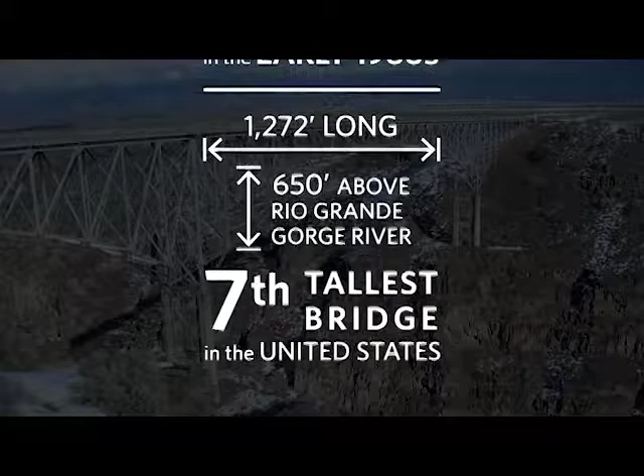An iconic vista in Taos County, New Mexico, the Rio Grande Gorge Bridge, located on US 64, was designed and built by the state's highway department in the early 1960s. At 1,272 feet long and 650 feet above the Rio Grande Gorge River, this historic structure is the seventh tallest bridge in the United States. It is attractively positioned across the gorge and complements its surroundings.

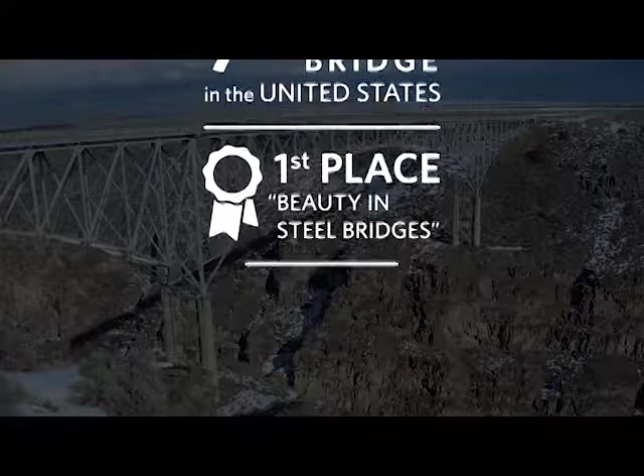Within a year of opening, the bridge was awarded first place for beauty in steel bridges by the American Institute of Steel Construction, and by the late 1990s was listed on the State Register of Cultural Properties and included in the National Register of Historic Places.

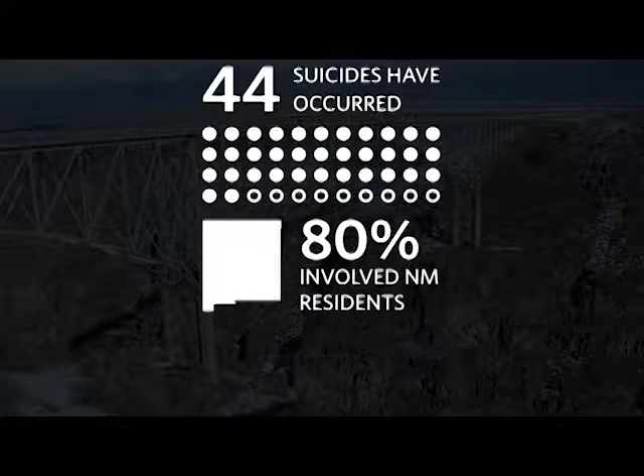While the historic bridge holds beauty, recognition, and significance, 44 suicides between 1991 and 2017 have occurred at the bridge, with 80% involving New Mexico residents, according to the New Mexico Office of Medical Investigators. To provide a broader view of the suicide rates in New Mexico, the suicide rate statewide is consistently 1% higher than the national suicide rate. In the last decade, statewide suicides have totaled 4,235, of which 113 occurred in Taos County and 22 at the bridge.

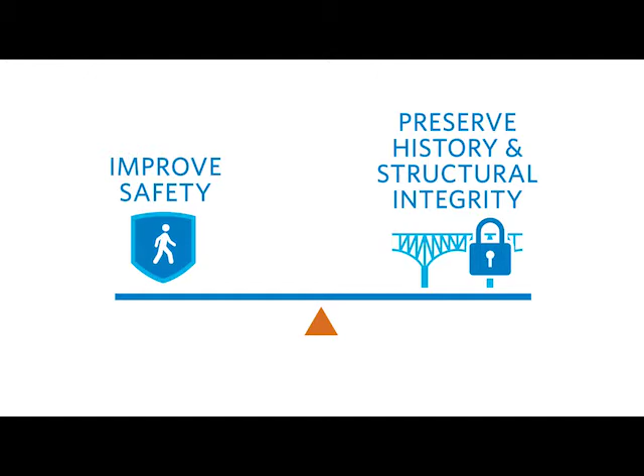Safety of the public remains a top priority for New Mexico Department of Transportation. Balancing the need to improve bridge safety while preserving an important piece of history as well as the structural integrity of the bridge has driven the need to conduct a feasibility study that identifies bridge enhancement options to deter future suicide attempts. Initial studies from 2009 and 2015 identified several alternatives consisting of netting systems and different types of railings.

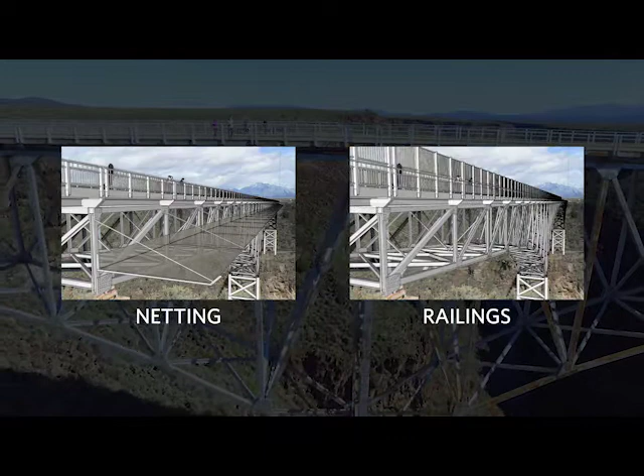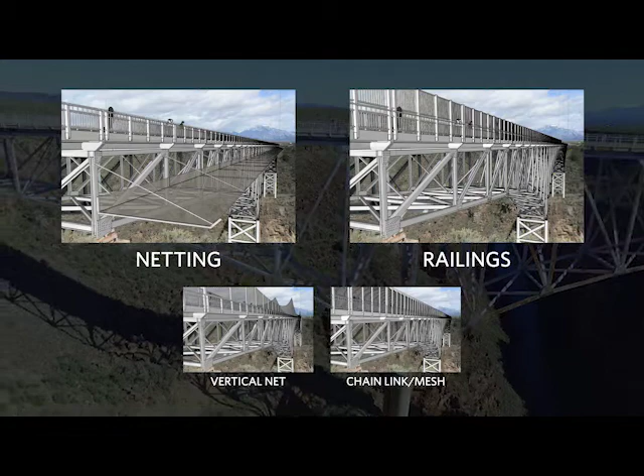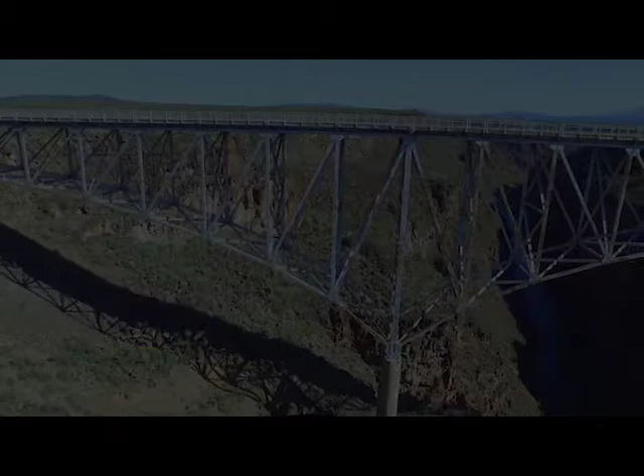Alternatives identified as having significant impacts to the bridge's structural integrity, visual resources, safety, and/or historic integrity were eliminated from further study. Other considerations included community input, engineering feasibility, constructability, maintenance, inspection access, and cost. 3 feasible alternatives were carried forward into the current study: the vertical railing alternative, the horizontal net alternative, and the no-build alternative. The current study evaluates the structural feasibility of adding a rail or net system to the existing structure as well as future improvements to maintain the existing bridge associated with the no-build alternative.

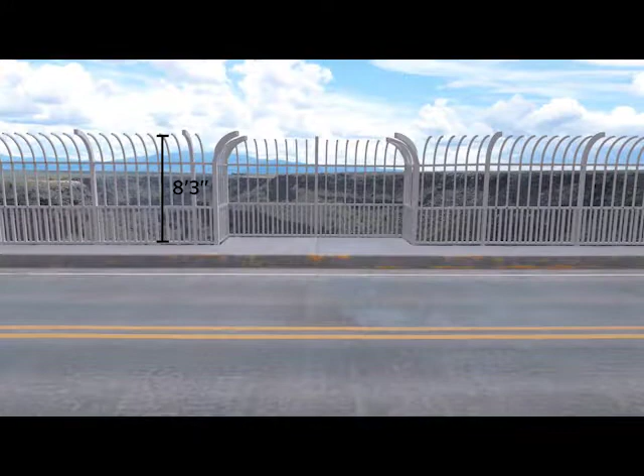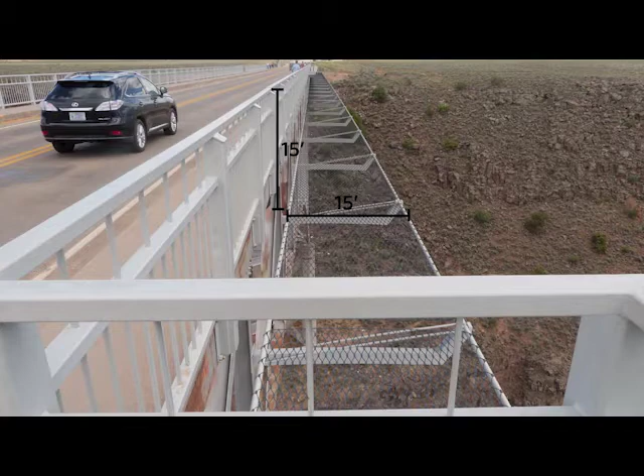The 8-foot 3-inch high vertical railing alternative would replace the existing pedestrian rail. The horizontal net alternative would be installed approximately 15 feet below the existing railing and extend out 15 feet from the edge of the bridge. Specific details such as the type of railing or netting, colors, and type of material will be determined at a later time should an alternative move forward into design.

To determine impacts, the study analyzed existing bridge conditions and evaluated each alternative for constructability, maintenance, inspection access, structural feasibility, and cost. Environmental factors such as impacts to historic resources, visual impacts, cultural resources, and community values were also taken into consideration.

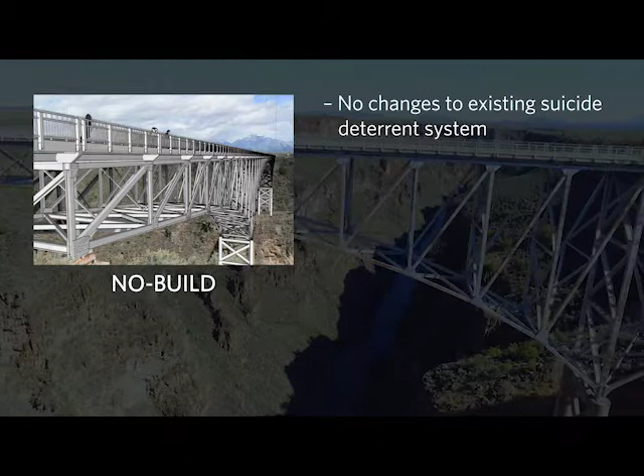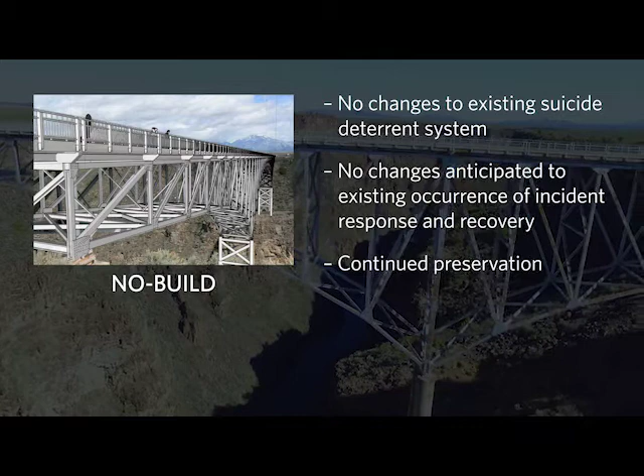The no-build alternative would not make changes to the existing suicide deterrent system, such as the suicide hotline, and it would be anticipated that the existing occurrence of incident response and recovery would not change. The construction funding associated with this alternative would consist of continued preservation of the structural and historic integrity of the bridge, along with improvements to the bridge members that require repair or replacement. Coating of the bridge may also be necessary to extend the life of the existing structure.

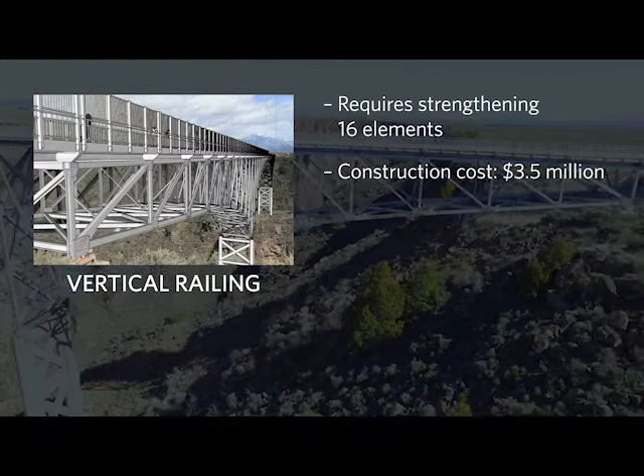The vertical railing system alternative would require strengthening 16 elements of the existing bridge with an estimated cost of approximately $3.5 million for construction. It assumes that the cost for incident response and recovery could be reduced. However, cost to maintain the existing structure, new railing, and strengthen bridge members would increase.

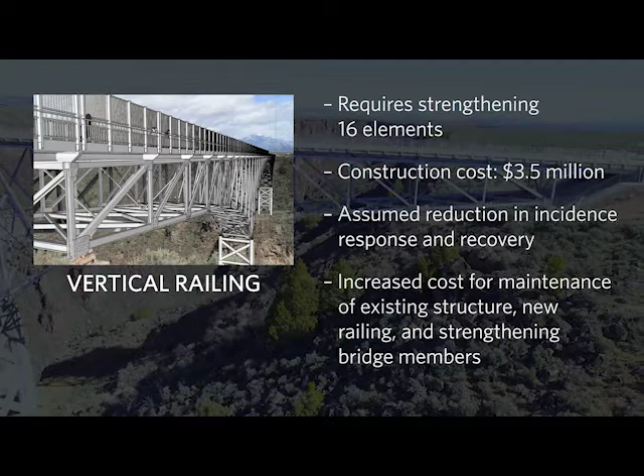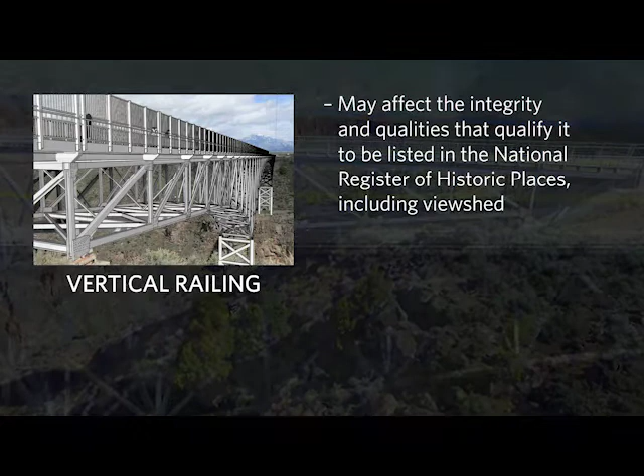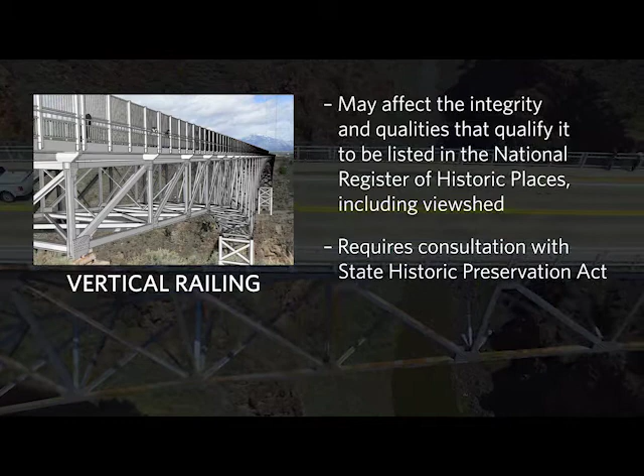The addition of a vertical railing on the historically significant property may adversely affect the integrity and qualities of the bridge that qualify it to be listed in the National Register of Historic Places, including the viewshed that provides a wide-open perspective of the surrounding landscape and the Rio Grande Gorge. This option would also require consultation with the State Historic Preservation Officer and the Federal Highway Administration if selected to move forward.

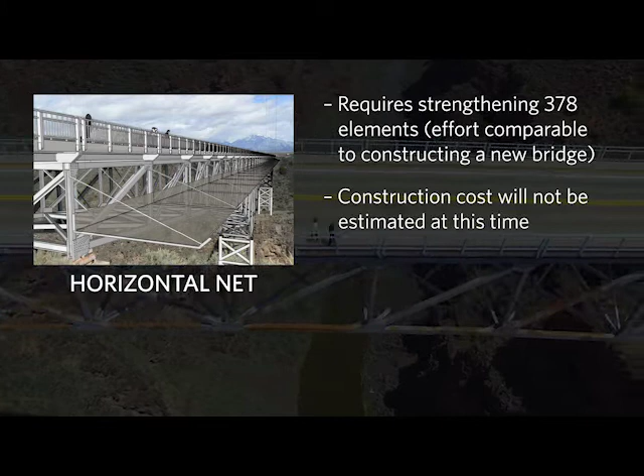The horizontal net system alternative would require strengthening 378 elements of the existing bridge, an effort comparable to constructing a new bridge. A construction cost estimate will not be developed at this time because of the extensive effort that would be required for this alternative. Due to the location of the deterrent system, inspection access will be impacted, requiring the net to be raised, lowered, or pulled aside and then resecured for each inspection effort.

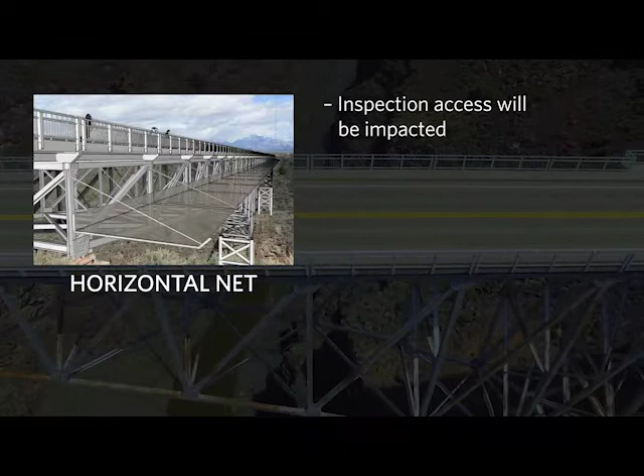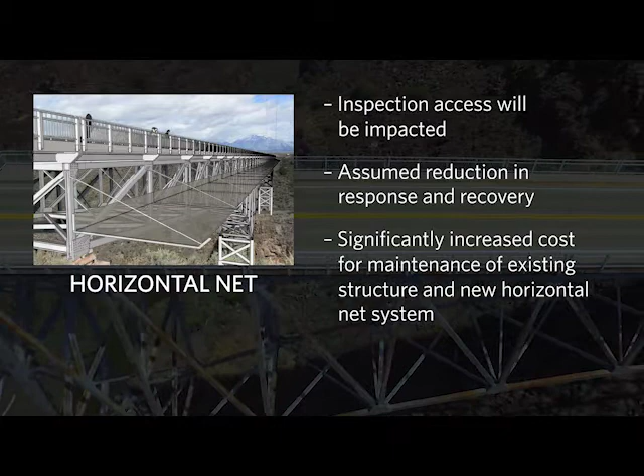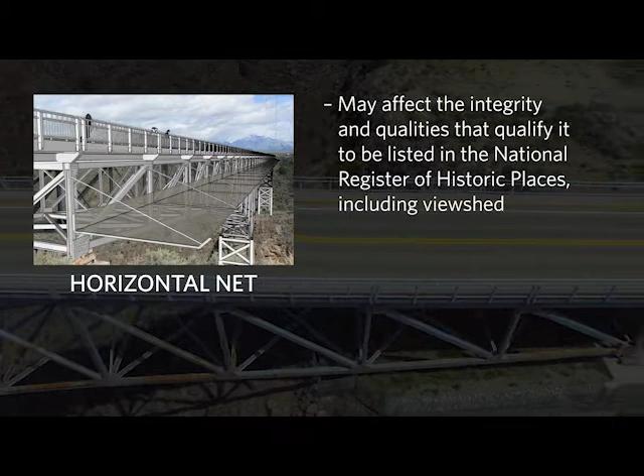It is assumed that the cost for incident response and recovery could be reduced. Costs to maintain the existing structure and new horizontal net system would increase significantly. Similar to the vertical railing system, the addition of horizontal netting on the historically significant bridge may adversely affect the historic integrity and the current viewshed looking down at the Rio Grande Gorge. This option would also require consultation with the State Historic Preservation Officer and the Federal Highway Administration if selected to move forward.

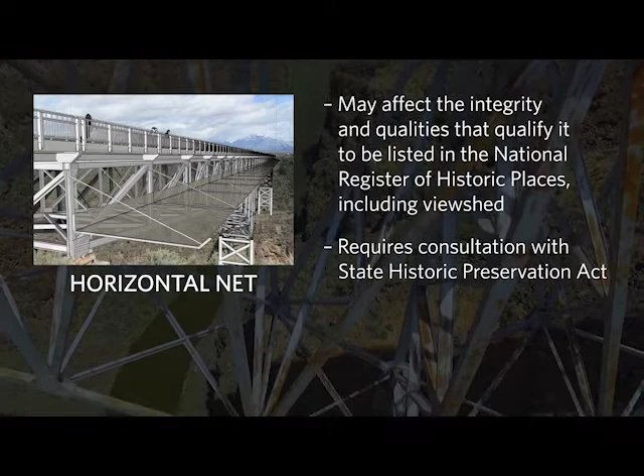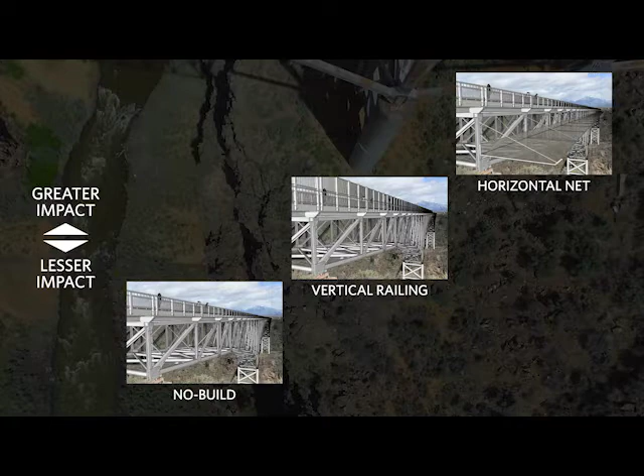A comparison of all three alternatives resulted in both the vertical railing alternative and horizontal net alternative introducing greater impacts to the existing bridge and future maintenance cost than the no-build alternative. Of the build alternatives, the horizontal net would require more significant and costly modifications to the bridge than the vertical railing alternative. Therefore, it was eliminated from consideration. As such, the no-build alternative and vertical railing alternative will continue to be viable options under consideration.

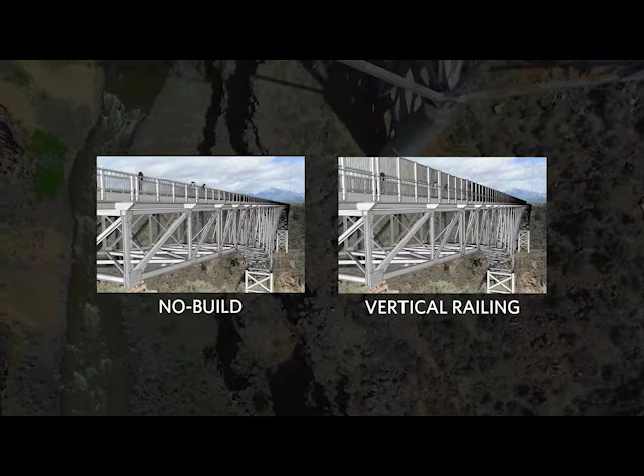Ultimately, historic preservation, environmental effects, and public input will continue to play a major role in the decision-making process. Given the overlapping considerations of historic significance, environmental impacts, structural functionality, and community values, the DOT encourages ongoing public engagement and input into the study. Your comments will be taken at this meeting or through the website. Once complete, the study will be available to inform further discussions within the regional planning process and for potential inclusion in the State Transportation Improvement Plan for funding next steps.